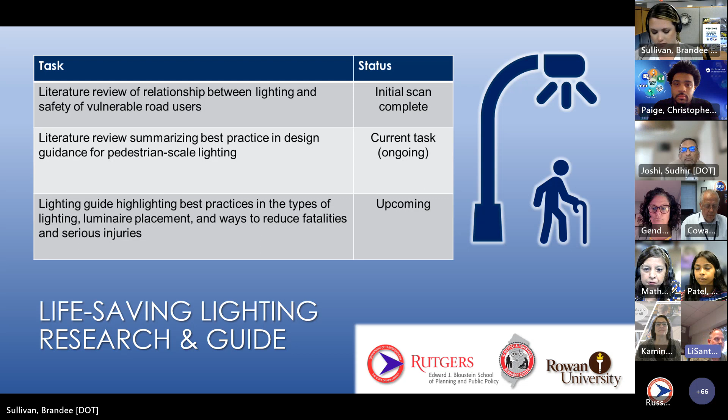Activity 2, NJDOT, through a task order contract, is developing traffic signal pole and mast arm details based on the 2015 AASHTO requirements for signalized intersection installations, including back plates with retroreflective tape on traffic signal indications. Once those new details are completed, NJDOT will require all new installations to include back plates and retroreflective tape on all signal indications. The preliminary submission for the task order to develop the new signal standards will be made in August. At this time, the Bureau of Traffic Engineering has been installing back plates on signal pole heads installed on steel mast arms whenever possible.

I think that ends our update for the safety group. Okay, thank you, Dan and Amy. Next up, we have Shivani Patel and Nunzio Merla from our Infrastructure Preservation Team.

Good afternoon. My name is Shivani Patel, and I'll be providing the update for the Infrastructure Preservation Initiatives. So there are 2 initiatives.

First is EPIC. Internally curing concrete has many benefits. To provide a little background, this practice involves providing water to the cementitious matrix after setting. With conventional curing, water is supplied on the concrete surface. Internal curing provides a source of moisture from inside the concrete's mixture with pre-wetted lightweight aggregates which distribute the curing water throughout the concrete body.

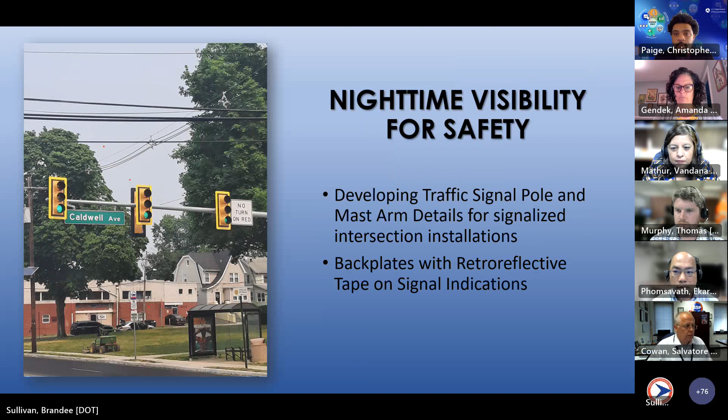Thank you, Sal. Okay, let me just skip forward. Okay. Thank you, Aik, as you were. Continue. Thank you, Brandee.

We also wanted to provide some clarification: we originally assessed ourselves as being institutionalized in practice. Upon further discussion among the team, we thought it would be better to take a step back and put us in the assessment stage, part of that continuous improvement, continue to assess the technology, identify some best practices and lessons learned, and also incorporate some strategic activities into the NJDOT ITS and traffic ops work program.

A QR code survey was also developed based on the EDC implementation plan form. The next subsequent step is to review feedback from the local agencies and emergency responders to better understand their needs and challenges, if any, and better help inform NJDOT with the development of implementation plan activities.

We also have an abundance of trucks in the left lanes of roadways that can cause traffic to move slowly. There is a plan in place for NJDOT to deploy no-trucks-in-left-lane alerts for truck drivers. Information will be sent to the in-cab or mobile device utilizing the Drivewyze system for roadways that have more than 2 lanes, as a way to remind truck drivers of the state vehicle code of no trucks in the left lane for corridors that have those signs in place.

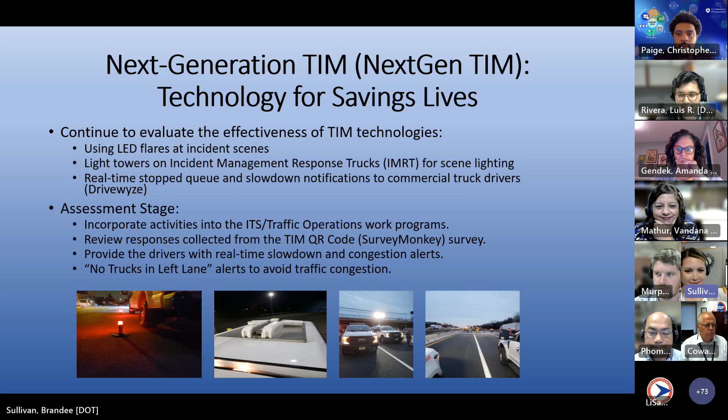Okay, thank you, Aik. Now, last we have Sudhir on behalf of Andy Swords and Sutapa with updates from our newest CIA team, Planning and Environment. So I'll pass it over to you, Sudhir.

Okay. Brandee, can I share my screen? That would be easier because I have my notes to speak from. Okay. Sure. Yeah. All right. Let me share my screen first. All right. Can you see my screen? Yes.

Oh, it should come up.

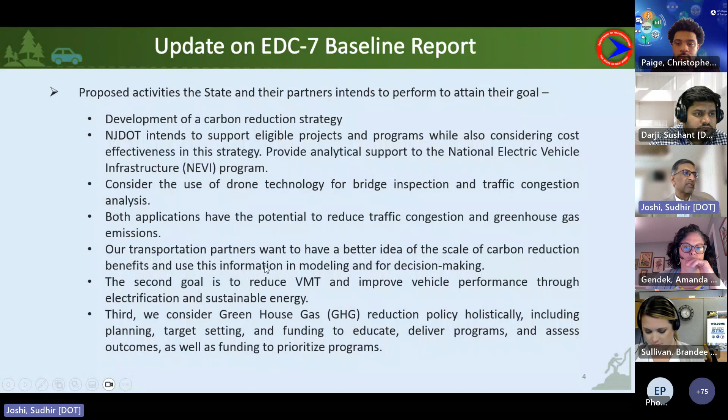So the other question is, can the innovation deployment team provide assistance to help the state and their partners reach their goal within 2 years? So how we can achieve? By training, technical support on specific projects and issues, workshops or peer exchanges, and case studies.

The next is innovation implementation team members. Who are the team members? For NJDOT, Andy Swords is the lead, and Sushant Darji from our unit. And Brandy's name is not here, but I believe Brandy is also one of the lead team members here. And from Federal Highway side, Sutapa and I believe Chris Paige. So this presentation, Sushant, we need to revise before we send it out.

The state innovation goal, the benefit goal. So currently transportation accounts for about 42% of the greenhouse gas emissions in the state and 29% of the greenhouse gas emissions nationally. The obstacles are difficulty generalizing the effects of the projects to the entire transportation sector and the need to develop a process for understanding greenhouse gas impacts of the construction. And the implementation plan activities, the deployment of carbon reduction strategies and NEVI program support.

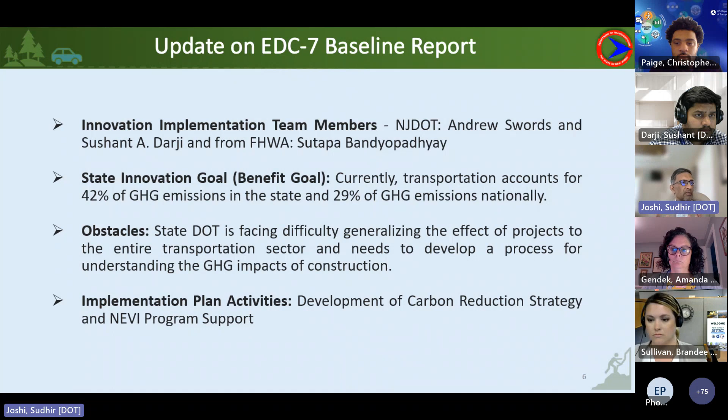So next, the background. As you know, the Bipartisan Infrastructure Law established the CRP and provided funds for the projects designed to reduce transportation emissions, as carbon dioxide, CO2 emissions from on-road highway sources. And other emissions can also be converted into equivalent of carbon dioxide, CO2e, they call it. And funds apportioned to each state, eligible project types, coordination and consultation, and completion of the CRP strategies are by November 15, 2023. So that's our deadline we are focusing on.

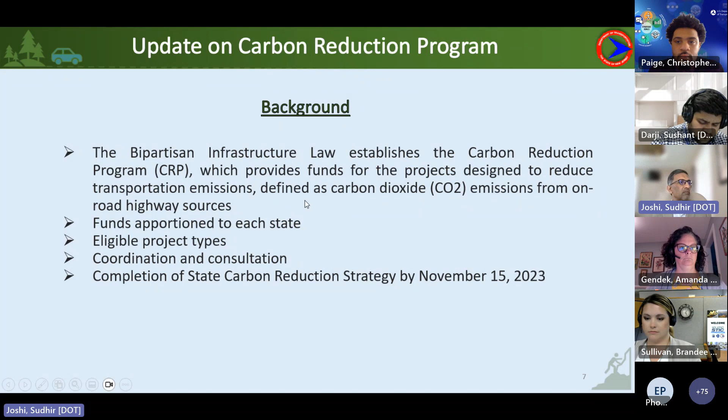The purpose is to identify projects and strategies that will contribute to helping New Jersey reduce its transportation-related emissions and serve as a basis for the state's decision-making on the use of CRP funds. The consultation with the other agencies. So we conducted a survey involving multiple agencies to determine the types of projects being pursued by the state, established a strategy that considers present plans without excluding the future plans, and developed a strategy that may serve as a resource for the other agencies.

So what are the project types? Replace medium-duty trucks, replace diesel off-road equipment, new active transportation facility, expand transit bus services, signal synchronization along corridors. Our task partners would be very helpful in those strategies. Construction methods, replace lighting with LEDs, install public EV charging stations. We are working towards the NEVI plan. Replace diesel buses. We have a diesel retrofit program that we are working to progress further, and new van pool services, expanded light rail services, projects to relieve highway congestion, innovative technologies, and replace heavy-duty trucks.

So, a project example for sustainable construction materials like foam glass aggregate. This has been discussed in many presentations and many times before. But what it does, it provides 50% less CO2 than other lightweight aggregates. One truck of foam glass aggregate equals 7 trucks of regular backfill off the road. So it's a big reduction in carbon emissions.

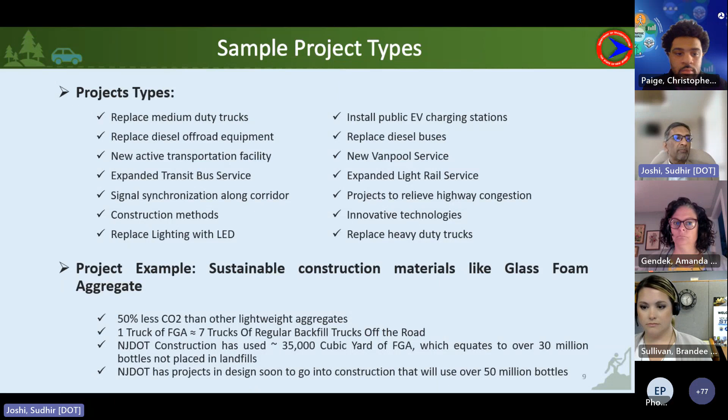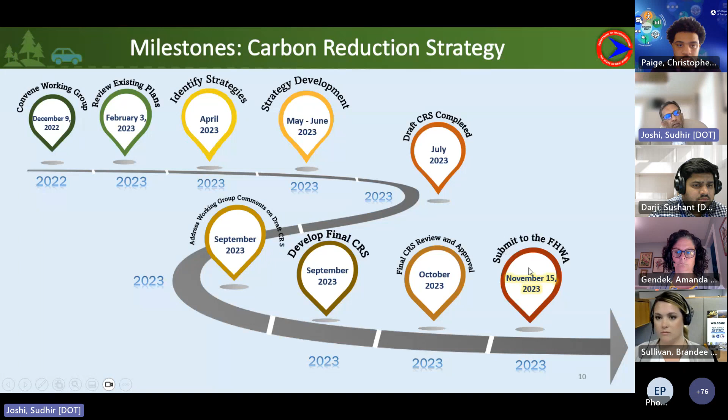And in September, we address the working group comments on the draft carbon reduction strategies and develop the final strategies. Then we get the approval in October and submit on November 15. Currently, we are establishing these strategies by soliciting feedback from all the other agencies and analyzing the approaches developed by other states for their states. So we're taking benefit from knowledge from other states.

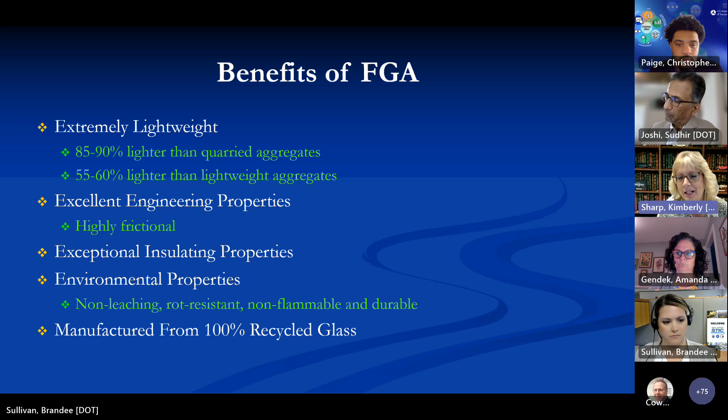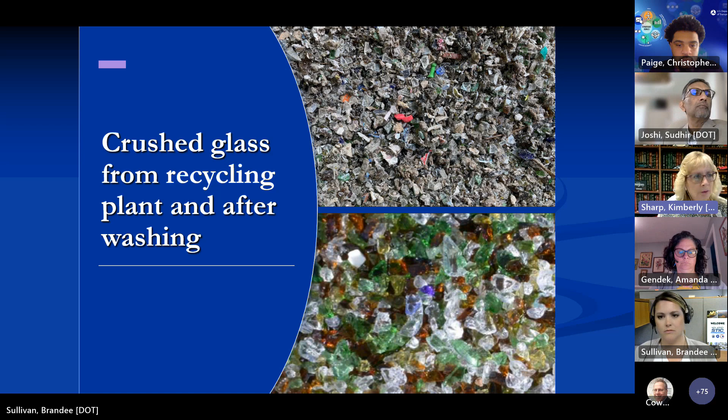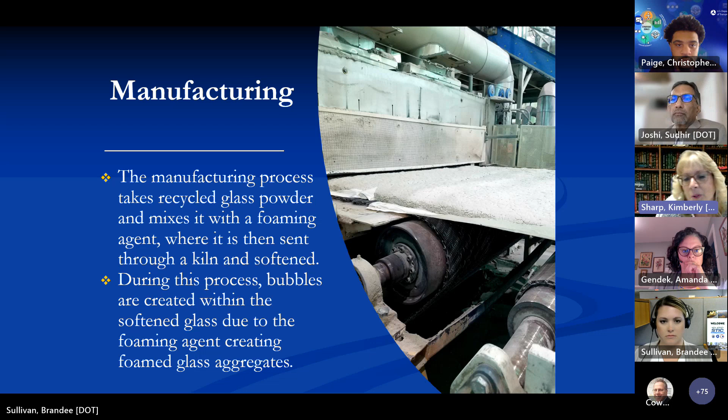On the next slide, you'll see at the end of the conveyor belt, once it's cooled, it'll drop down onto another conveyor belt and it goes outside into a big pile. I know you guys can't see me too well, but these are pieces of the foam glass. It's very, very light, and they're just variable sizes. It looks like an aggregate. And so this is the process of how it's made, and there's hardly any people or machinery that goes into the process of making this. It's a very, very simple technique.

So how do we use it in transportation? In areas where we've used it and we're going to use it, like in Atlantic City or up in Kearny, some of our roads are level with ground zero, where the water level is. We have tidal effects or heavy rains, and our state highways will start to flood over. So we say, okay, we want to raise them up 2 or 3 feet so our roads aren't getting shut down when we have a full moon or high tide or heavy rainstorms.

But we may have some soft compressible soils right underneath the pavement. So what we can do is excavate out some of this heavy regular material and replace it with this lightweight foam glass aggregate. It is wrapped when it's installed; I do have some pictures I'll show you. And then we have to cap it with heavier material because it is lightweight and will become buoyant in water, so we want to make sure that we have enough weight on top of it. Our pavement people require, I think, 8 or 9 inches of soil above that before they put their pavement box on top.

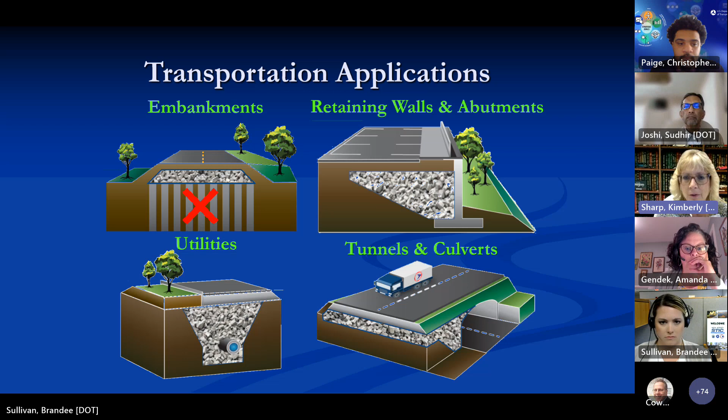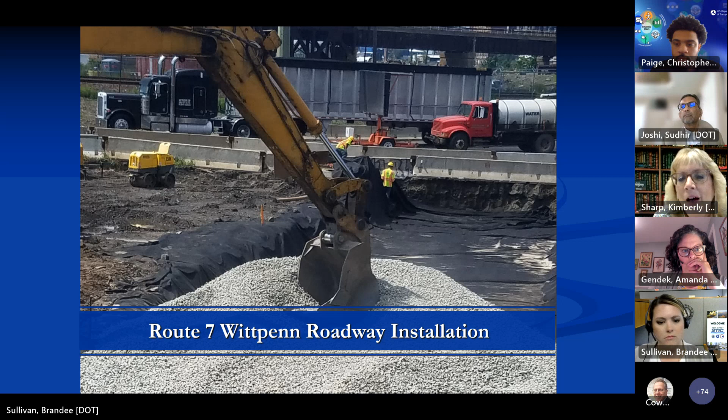Then the foam glass aggregate is dumped into, yes, you jumped a little quick, but anyway, so the truck in the background, because I don't have my pointer, but the truck in the background is how the lightweight, nope. You can go to that one, okay.

So the truck in the background, that's what the lightweight aggregate comes in. It's got a lift on it, it'll dump it out, and then the backhoe will spread it out. You can see the black liner and the material spread out, and we don't compact it like regular soil. There is a small compaction that you have to do. If you have a track mounted machine such as that, you have to put it down in 2-foot layers, and you have to do like 4 passes on it. If you don't have a track mounted machine like that, you have to do it in 1-foot lifts, and you have to do hand tamps of like

4 passes. But anyway, so the material comes, it's wrapped up, completely surrounded, so they don't have infiltration of the soils around it getting inside of it. You can go to the next slide.

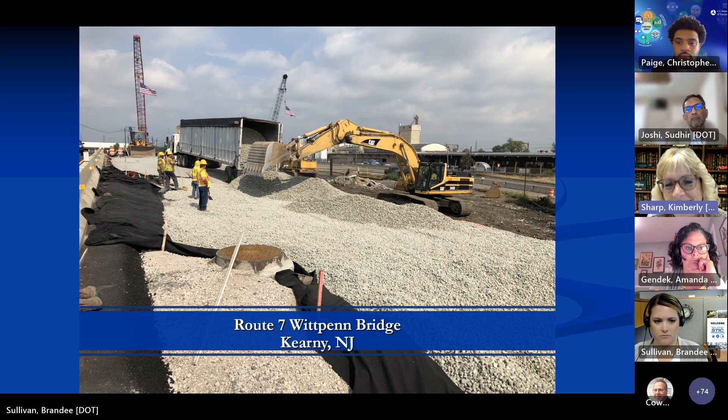We removed the existing soil and the approach slab, and we laid down, like I said, the geofabric material and the foam glass aggregate to lighten the load on the approach.

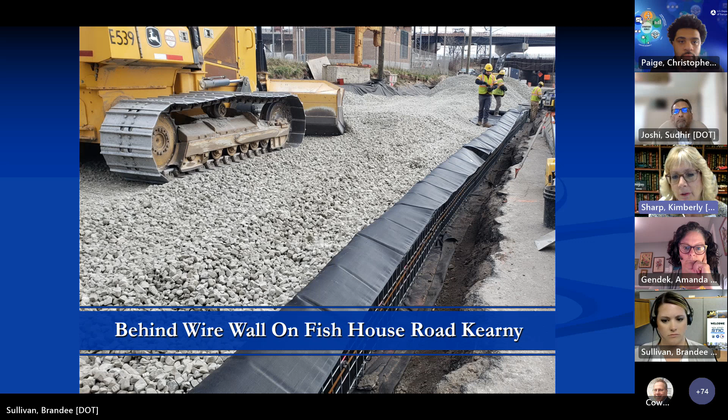But this was absolutely great because the soil that we have out in and around Fish House Road is highly, highly compressible. So this was a very good product for us. And go to the next slide.

So this is just explaining how many millions of bottles New Jersey DOT has already saved from going into the landfill. So on the Route 7 Wittpenn project, we saved 27.6 million bottles from going in the landfill. The Route 80 over Rockaway, which I showed you where we used it on the back walls and the approaches to the existing bridge, we saved, that was cute, the little applause, Sal, 1.9 million bottles.

Route 1 and 9, New Road Contract 1, we didn't use too much there, but we did find an application where we had an issue and we had to look out for lateral forces. So we said, hey, let's use the foam glass aggregate. So that was still, I mean, it's substantial. It was 0.8 million bottles.

Route 322 Mullica Hill, in-house, we built a new wall to support an existing dilapidated wall, which was raised up above the homes in the river. And as a backfill between the two walls, we put in the foam glass aggregate, and that saved us about 21,000 bottles.

But, you know, we were all into using this, so we're like, hey, we're going to use it, even if it's a smaller amount. And then the next slide, I think, is talking about some future ones.

And like I said, down in Atlantic City, I know we have talked about it, where they want to raise Route 40 and 322 to get it up above the current high tide levels, so we're not flooding as much. And if they do, we calculated how much the cubic yards of normal soil they would need, and that equates to about 30 million bottles that we will save. Route 47 widening, same thing over compressible soil, so it helps to lighten that load for that widening of the road, 7 million.

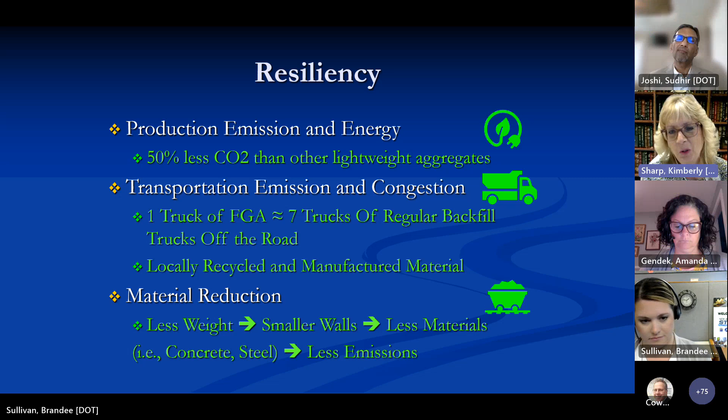And then we've been thinking in our office about different areas, like flood mitigation for underground reservoirs, maybe using the material. I know we don't build too many noise walls anymore, but years ago when we were building noise walls like crazy, we were looking at all different types of materials to put in there. We used shredded tires and different things, but if we do start building more noise walls, maybe we can put the foam glass aggregate inside the panels. And again, we're always looking at ideas with our rehabs for our abutments and our retaining walls, if we can find applications of using the foam glass.

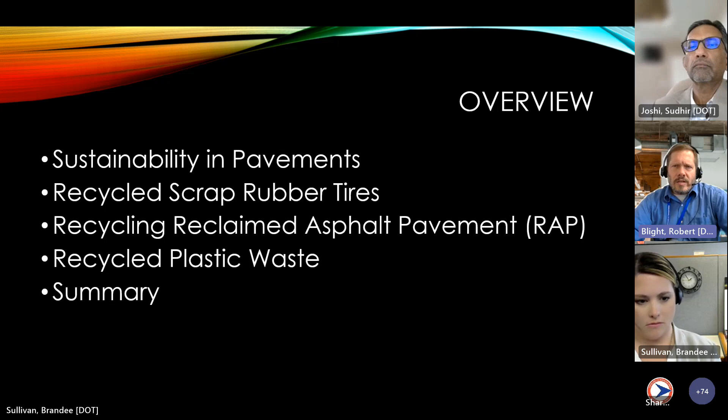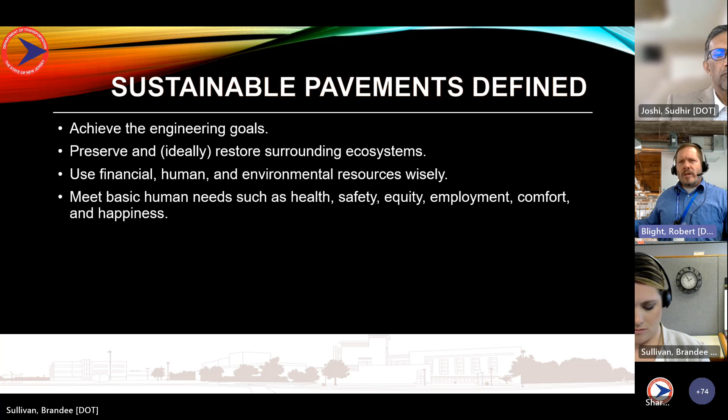Just sustainability defined, we want to achieve the engineering goals. We want to preserve and restore surrounding ecosystems. We want to use all our financial, human, and environmental resources wisely. And at the same time, meet basic human needs: health, safety, equity, employment, comfort, and happiness. Next slide, please.

So this is the life cycle stages for pavements. Most pavement materials are 100% recyclable. And we are recycling large amounts of our pavements back into new pavements and other applications. But quickly the stages: materials, design, construction, use, maintenance and preservation, and the end of life. Next slide, please.

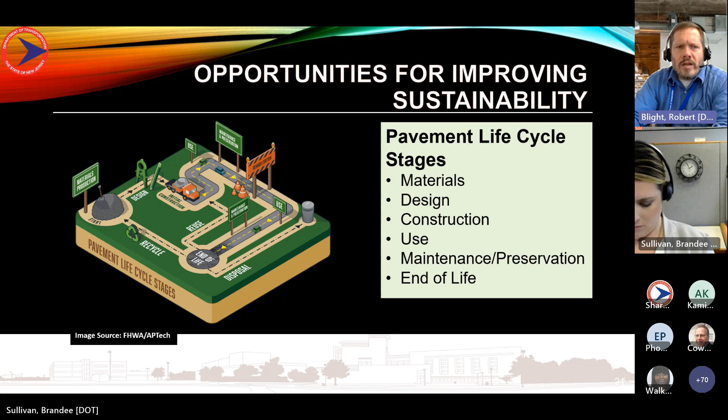So the benefits: we want to reduce pavement life cycle costs, greenhouse emissions, reduce energy consumption and noise, improve safety, ride quality, and conserve our natural resources as best we can. Next slide, Brandee.

So first one, recycled scrap tires. We've had some experience with this over the years, but as you know, it's a big waste product. It is an engineered product, so it has value. These tires, if they're made in the US, which is a requirement of use for our applications, it has to be manufactured in the US, but it has very good qualities, polymers that help increase viscosity of our asphalt binders. They can increase the film thickness on the aggregates, which in turn leads to better durability, crack resistance, and in fact, rut resistance in pavements.

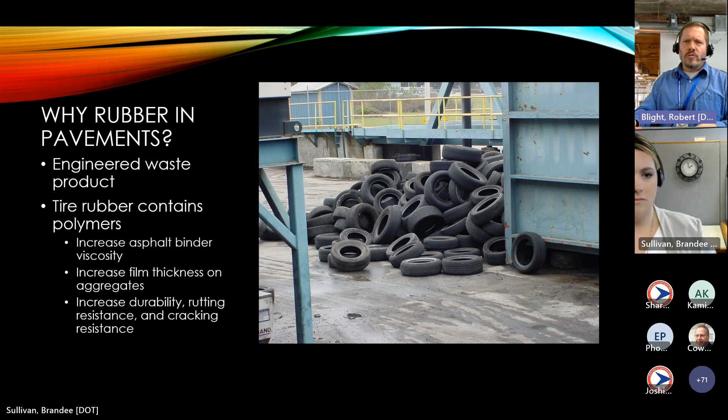The polymers modify the asphalt when used in a particular process called the wet process, and improve it on the high temperature end of the spectrum and the low temperature end of the spectrum. Next slide, please.

So what we're trying to achieve, we want to reduce the amount of tires that are going to landfill and reduce landfill, prevent pollution. Apparently, when these tires go into a landfill and water hits them, they bubble. That water then damages the liner in the landfill, and that leachate from the landfill can seep into the groundwater.

So other pollution that we're trying to prevent, tire fires. If anyone has ever seen a tire fire, they're nasty and they're difficult to put out. We had a structure on Route 80 years ago that was damaged due to a tire fire that we had to replace in an emergency situation. And methane gas. Methane gas is part of that air pollution issue.

Some of the other things we're trying to prevent is disease from pests, mosquitoes, rodents. These types of landfill debris attract this type of pests that can spread disease. Next slide, please.

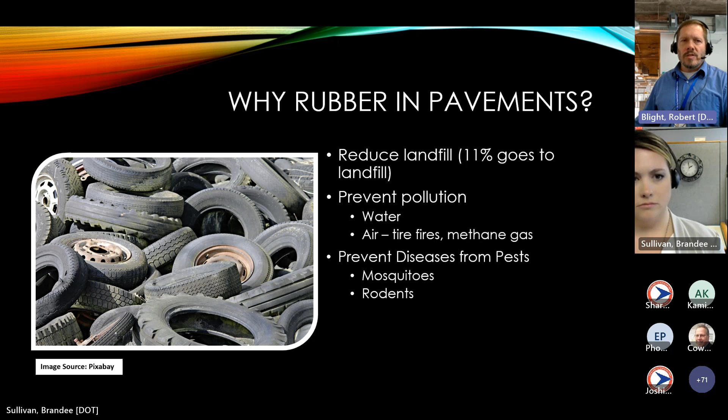So as I said, the process that is the most utilized across the country, that we've seen the most value from, is the wet process, which is a ground tire rubber material that's ground at a tire recycling plant and then is incorporated back into the asphalt according to this ASTM specification D6114. This asphalt rubber binder is then used in a few different products, which I'll go over 3 of them, but it's also used in other applications as well for pavements.

One of the ones that we use it for is asphalt rubber open graded friction course, asphalt rubber gap graded courses, asphalt rubber chip seal. What we found is that we can recycle up to 1,000 tires per lane mile when used in some of these applications. Next slide, please.

So this is what the product looks like. This is actually my hand at one of the plants where we were using this product on a project. But it's a 30 mesh, which if anyone's familiar with aggregate sieves, the material is about a 30 mesh sieve size. So it's like a beach sand. It's ground into that product. The steel is separated from it and the fibers at the recycling plant.

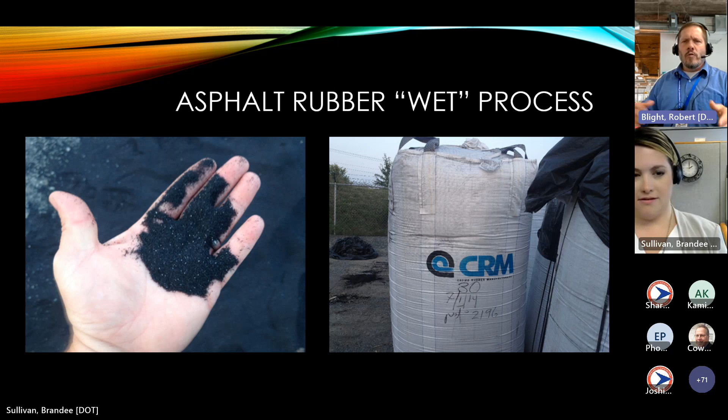That blending occurs, and then it's allowed to react in a reaction tank for a specified amount of time, and then it's tested to ensure that you have the right quality. It's tested for viscosity, actually rotational viscosity. Based on the temperature and rotational viscosity, the person at the plant can determine if the quality is sufficient for

that asphalt rubber binder. Once it's determined sufficient, it is added into the HMA production or the asphalt production at the plant, mixed with the aggregate, and then tested again for other properties for the mix, and then once approved, shipped out to the projects. Next slide, please.

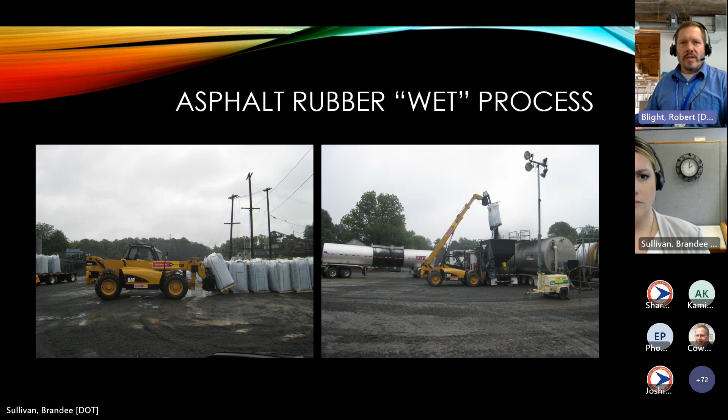So this is just one of many projects that we've done over the years. This was a project right here north of our location in Trenton on I-295, I believe it's between Scotch Road and Route 1, where we had a section of asphalt rubber open graded friction course constructed in around 2007. It performed for a number of years before we covered it with a preservation treatment.

But what we found in a lot of these projects is maintenance had issues with winter maintenance on open graded pavements in general. So we paused use of this type of material all over a lot of our highways. However, it still has applications in other areas, such as maybe shoulders or park and rides, things of that nature. So it may be something that we still have in our standard specifications and we may use in the future.

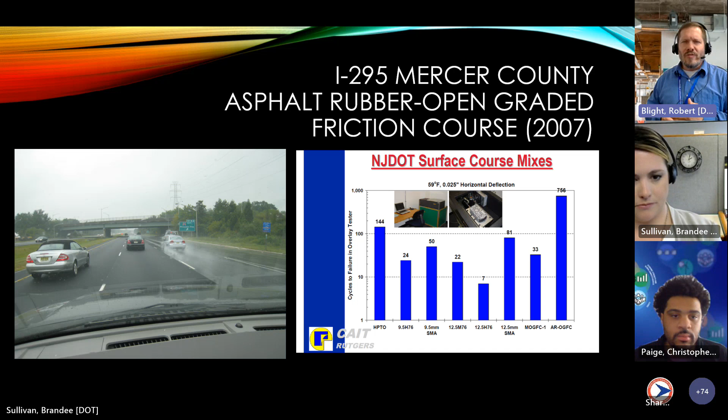Next slide, please. The same asphalt rubber binder goes into a few different products, as I mentioned. Another specification we developed is an asphalt rubber gap graded mixture, which isn't like the open graded where it has more of an open texture. The voids are around 14 to 20%. This particular product, the voids are more like a standard asphalt material, so we don't have the winter maintenance issues with it. So we've done one pilot project back in 2014, and we may get back to using more of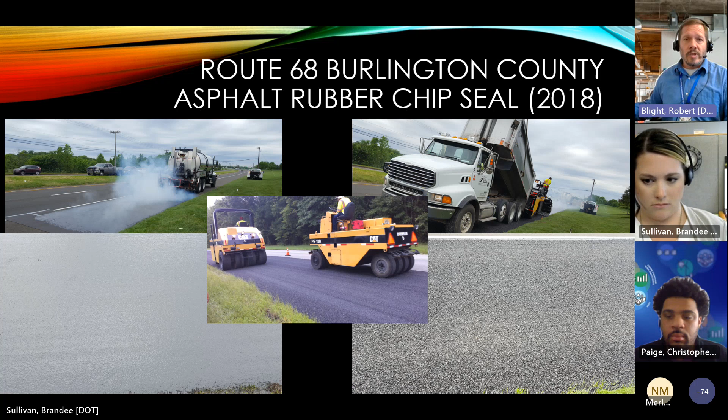A little bit about recycling or reclaimed RAP. Next slide. So what is reclaimed asphalt pavement? Again, it's what we get after we mill up a section of roadway for resurfacing, or we remove the asphalt entirely and ship it back to the plant. We have a pile or piles of RAP. This particular material is engineered. It was engineered for our roadways. It's just being ground up and sent back to the asphalt plant. So it's an engineered waste product.

It has value. Our goals are to reduce virgin material use, again, reduce energy consumption and emissions. If it's done correctly, it is economically sustainable. It's environmentally sustainable. However, there has to be a focus on long-term performance. We can't compromise performance just to say we recycled the material back into our roads. So I stress that because there is a push to use more RAP, but it's got to be done the proper way. Next slide, please.

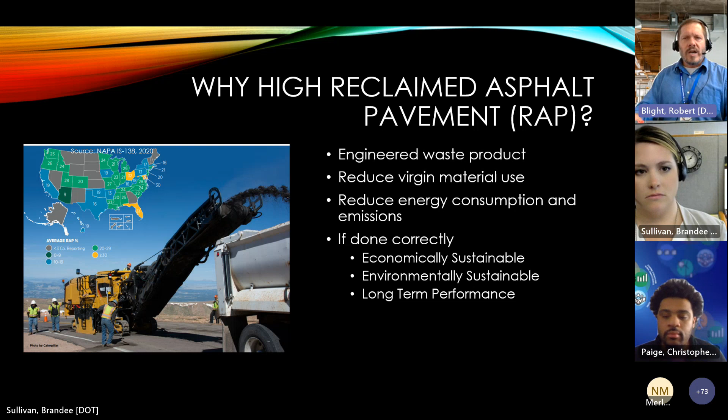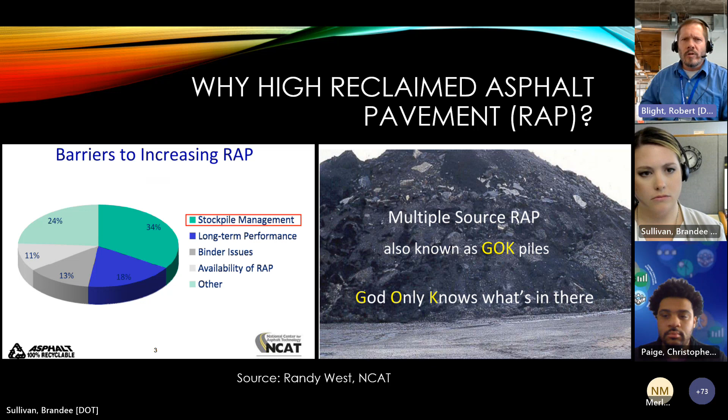There's some binder issues with certain quality RAP and the type of binder that you have to use to be compatible with it. In other parts of the country, there's a lack of availability of RAP. We don't have that issue in New Jersey. We have some mountains of it, and we're going to try and use more of it going forward. Next slide, please.

So this was a project that we did. Back in around 2011, 2012, we developed a hot mix asphalt high RAP specification. This specification allowed the industry to put in a minimum of 20% RAP in the surface course, which gives them free rein to put in 100% if they can design the material to meet our performance goals. Same thing with the intermediate and base, minimum of 30, 100% max, as long as they can meet our performance requirements. We had a successful pilot project on 295 down in South Jersey years ago, back in 2012.

It was a high RAP mixture, as you can see. It was very successful. It's still in place today. We're planning a preservation project potentially over top of it in the near future, but it can be done if it's done the right way with quality and long-term performance at the forefront of those decisions. Next slide, please.

Recycled plastic waste. We've been dabbling in this because there's been, as you know, a global push to do something with the plastic waste. So next slide, Brandee. As you may know, China stopped accepting plastic waste back in 2018, which caused a global panic because they were taking almost 50% of all global plastic waste, which equates to about 100 million metric tons annually. Now we have to find some place to put that plastic.

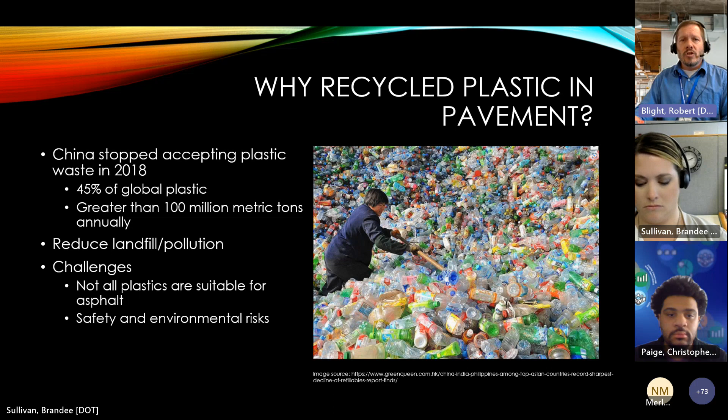We want to reduce landfill of that product because some of it is quality, not all of it. There's a very complex waste stream, as you'll see, but there's challenges. Some of it's not suitable for going back into our pavements, and there's safety and environmental risks. If we're blending it back into asphalt, it may cause very toxic fumes and things like that for our workers. So there's got to be great care in doing this the right way. Next slide, please.

So there's ongoing global research right now. In the US, we have the Asphalt Institute, National Asphalt Pavement Association, and NCAT, National Center for Asphalt Technology, looking at this and studying it. And there's a ton of other researchers across the country researching how to incorporate waste plastic back into pavements. But again, as I said, it's a very complex waste stream. There's all different qualities and types of plastics, contamination issues. So there's a lot of knowledge gaps. There's a lot of performance issues.

We are doing a study with Rutgers University, evaluating use of recycled plastics in our asphalt mixtures as a modifier. There's a number of products, as you can see on the left, what some of those look like with varying types of plastic in there. We found some suitable and some not suitable. Some actually are detrimental to the performance of the pavement. So again, great care needs to be taken to do this the right way. Next slide, please.

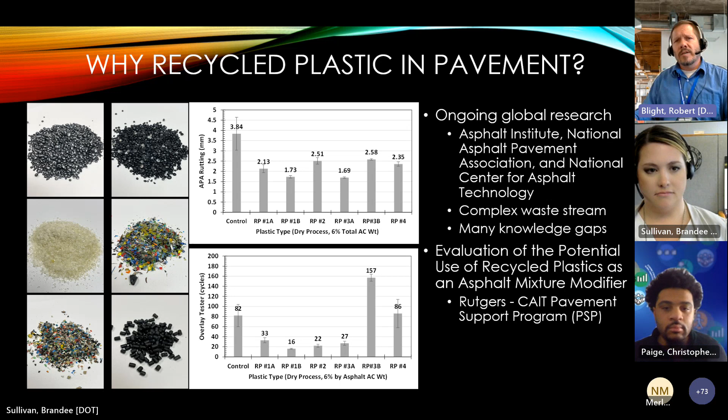So I took this from an article that was posted on Asphalt Institute's site. Dr. Mark Buncher, I've had many conversations with him over the years. He's a great guy, great resource for information, but he said plastic's not the first product that has been researched to add back into asphalt. RAP, asphalt shingles, crumb rubber, many of them, we're doing that. We're recycling them. But again, engineering and science has to lead the way in order to do this the right way. And it should certainly include long-term performance.

Next slide, please. So as a summary, we can use these recycled products in pavements, but we have to take our time and do it the right way, research it, engineer it, and let those types of research and findings drive decisions on how we're going to move forward using these recycled products. That way we don't suffer the results of unintended consequences. Research, standards, and governance, absolutely necessary.

Quality is a huge issue with a lot of recycled products in the industry. There's varying levels of quality at different plants, so we have to really pay attention to quality, make sure we're getting it. Health, safety, and environmental stewardship, long-term performance, and sustainability. Again, we can't let politics dictate how we do this. We have to let research and engineering dictate how we do it. That way we get roads that perform for our taxpayers. I think that's it for me.

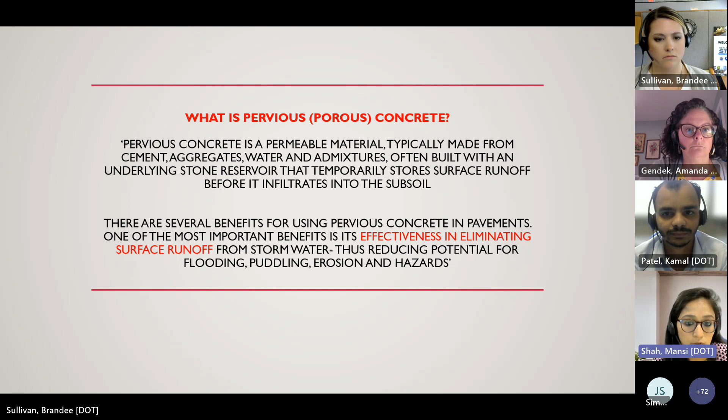Next slide, please. Phase 1 of this project involved evaluation of various mixes for mechanical properties, workability, and durability. Several sidewalks in Camden County were evaluated using visual inspection and infiltration tests. A survey of stakeholders on implementation of porous concrete was conducted, and several mixes were developed that would give higher strength while maintaining the required void ratio for acceptable infiltration. This was the recommended mix that they came up with. Next slide, please.

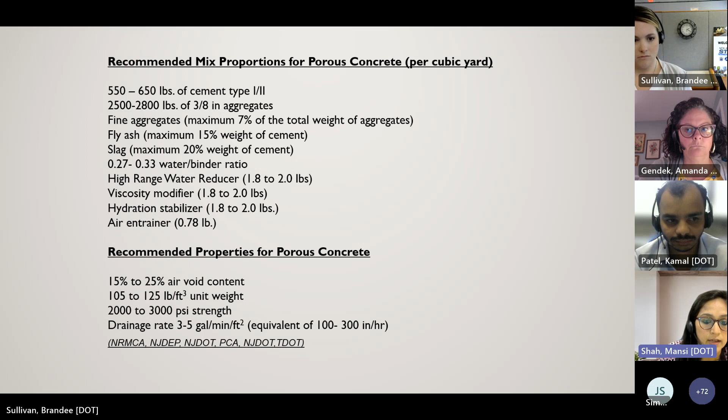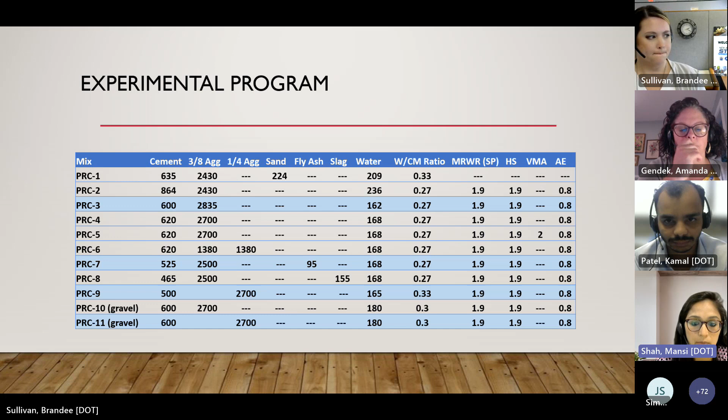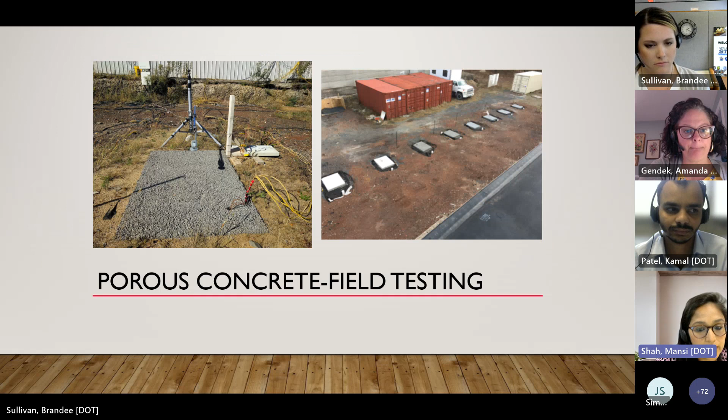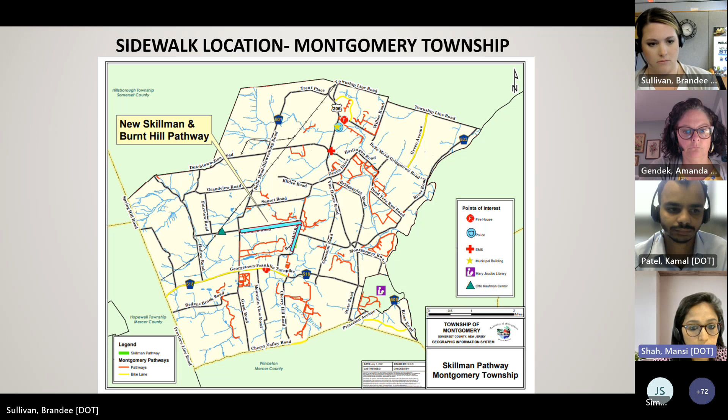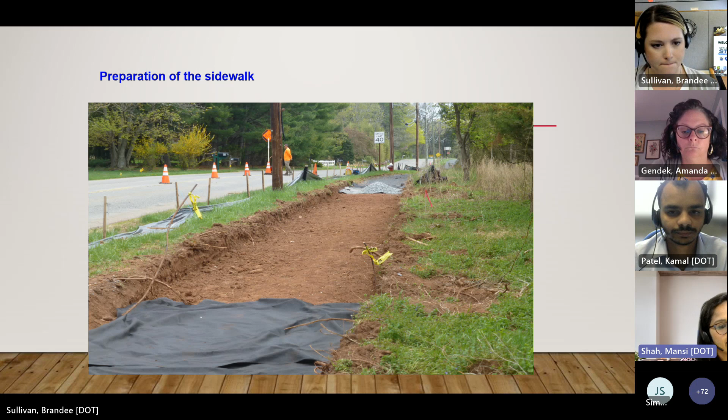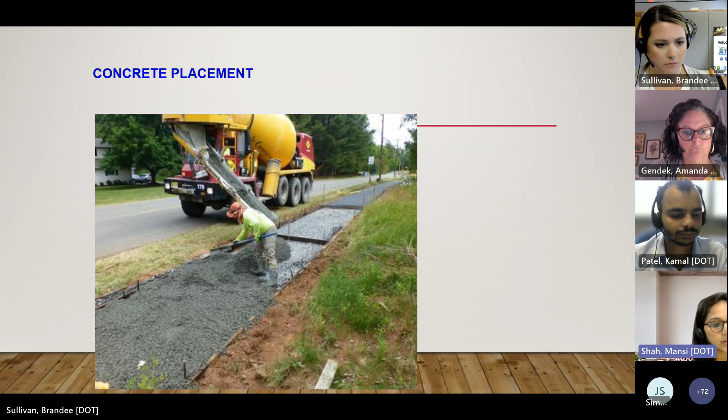Next slide. Here we can see some images of how the preparation for the sidewalk was done. Here is the fabric that is being laid. Next slide. And these are just some images. We can keep going through them, Brandee. And then this was the placement of the expansion joint filler. Concrete was being placed. And then the finishing. And here is a view of a finished section of the sidewalk.

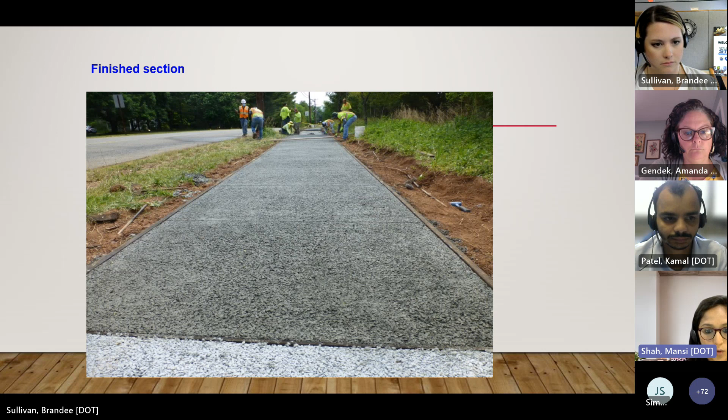Next. And there was also a collection of field samples that was done. And then the sidewalk was monitored and evaluated over time to assess its performance. The monitoring of the built sidewalk included visual inspection for surface texture, clogging, and raveling, periodic infiltration tests to measure variation of infiltration rates over time, and coring of cylindrical cores to measure in situ void ratio and compressive strength in the lab. Next slide, please.

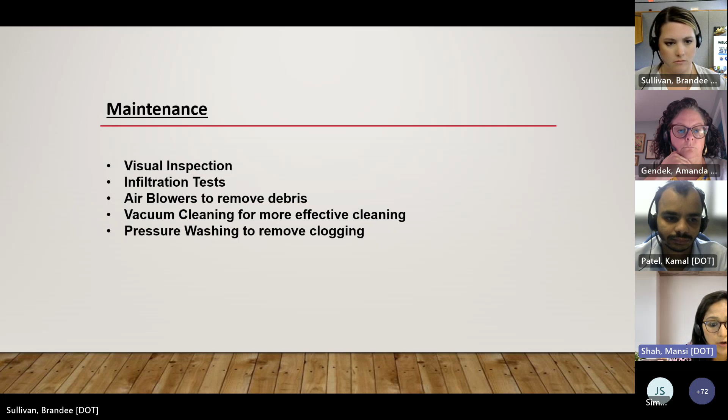Visual inspection showed that air blowers can keep the sidewalk free of debris if done frequently, but vacuuming with suction twice per year was more effective and can keep the porous concrete sidewalk free of debris and minimize clogging. Next slide, please.

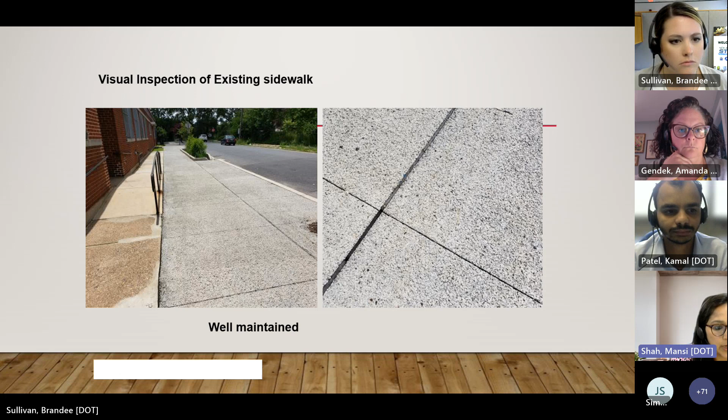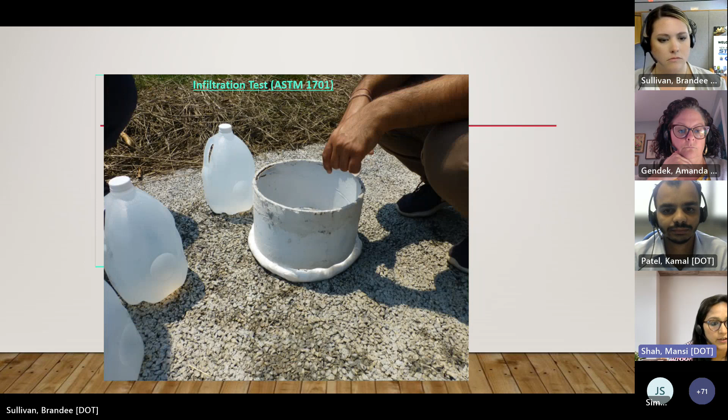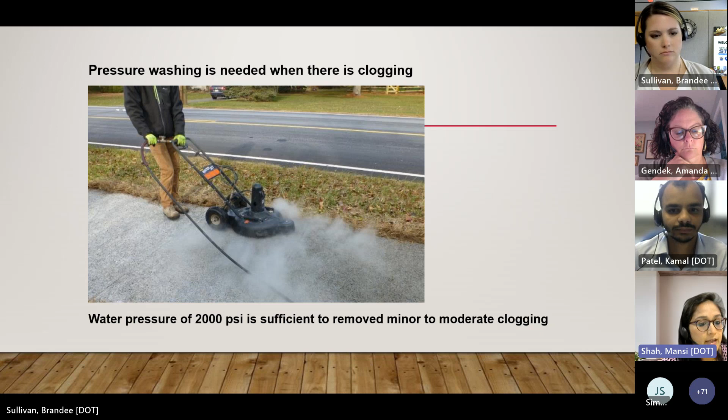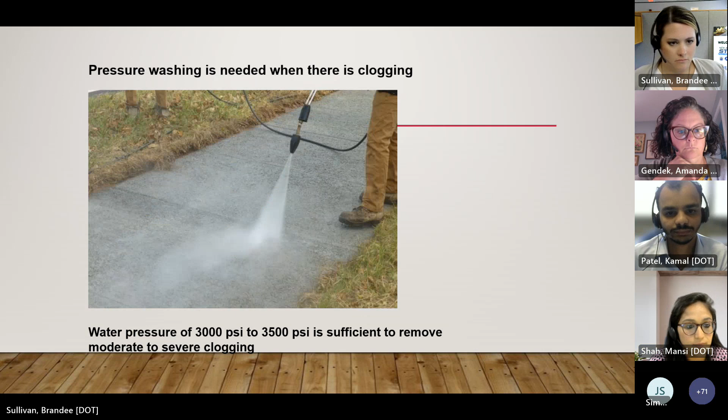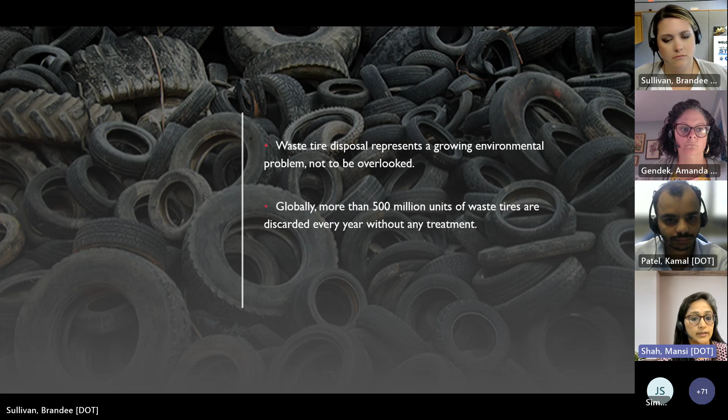Next. The next sustainable material that is being researched is rubber concrete. And thank you, Robert, for your presentation before this. We weren't aware of all the stuff that you've already been doing, but this is an area, next slide, please, where the Bureau of Research wants to conduct further research studies as well, as we know that waste tire disposal represents a growing environmental problem, and more than 500 million units of waste tires are discarded every year without any treatment.

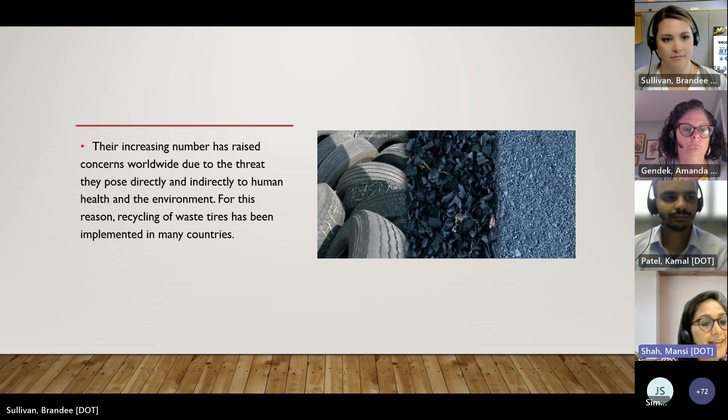Next. This has raised concerns worldwide, and it poses a threat to the environment as well as human health. The possibility of recycling scrap tires as aggregates in concrete and asphalt has gained acceptance worldwide, and the Bureau of Research is currently looking into this material for possible use on roadway applications. Thank you, Robert, for your detailed presentation of how asphalt rubber binder has been used. Next. We would be happy to collaborate on research projects in the future if you have any specific research needs in this area. And that's it from me.

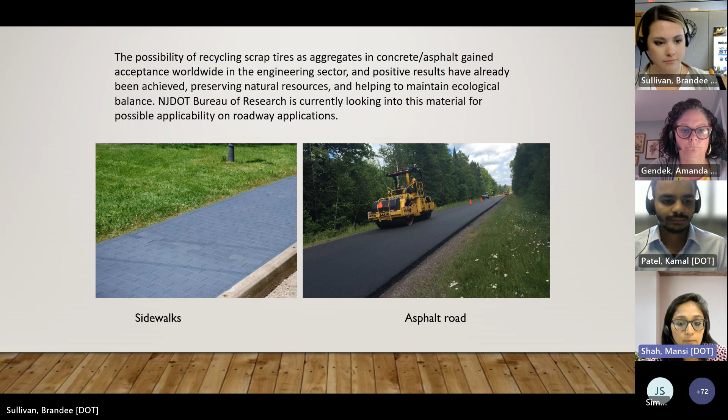I would like to invite my colleague Kamal Patel to talk about energy harvesting now. Hello, good afternoon, everyone. My name is Kamal Patel, and I'm going to be presenting on energy harvesting from roadways and bridges. The PI for this project was Hao Wang, and the project manager for this project was Giri Venkiteela. And next slide, please.

So there is growing congestion in transportation, and along with that, there is also deterioration of infrastructure. These are some of the challenges that the DOTs face, along with monitoring of that deteriorating infrastructure. There's also a challenge in the significant amount of electricity being produced from fossil fuels, which are increasing greenhouse gas emissions. All of these challenges can be addressed by using our current transportation infrastructure to generate electricity.

Next slide, please. For the research motivation of this project, the research was conducted in two phases. The first phase looked into photovoltaic materials, and the second phase looked into piezoelectric materials. In the first phase, the photovoltaic materials, or solar panels, were mounted on noise barriers. This would help generate electricity, reduce greenhouse gas emissions, and also reduce noise at the same time. So next slide, please.

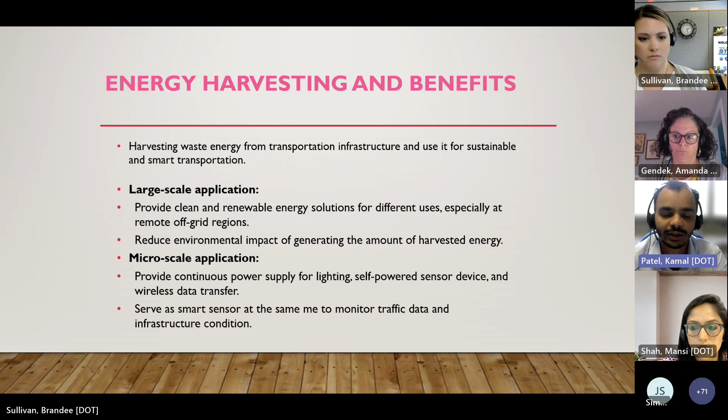put in this technology. And also the electricity that is generated could be used to power sensors and other lighting and also wireless data transfer devices along with the noise barriers to monitor our traffic data and also to monitor our current infrastructure. Next slide, please.

So photovoltaic materials are basically devices that, when they absorb light, produce electricity, and they have many different applications in the transportation industry. We could be using them on tunnels, on our sidewalks, and also on noise barriers, and there are many more different alternatives for solar panels in transportation. Next slide, please.

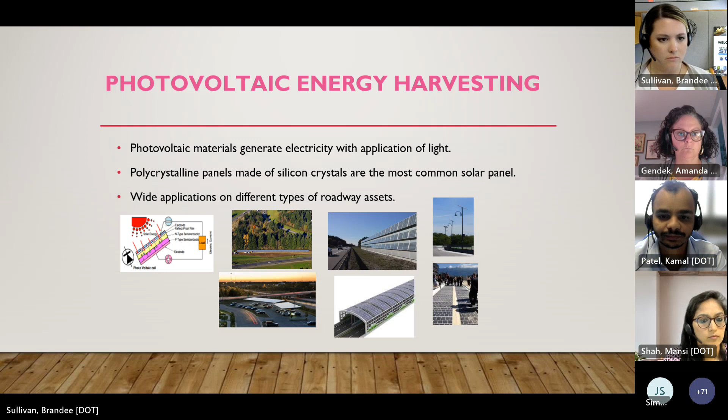So for this project, we had a design configuration of retrofitting solar panels on noise barriers in three different configurations. First was top mounted, then there was multifacial, bifacial, and also there was shingles. And next slide, please.

And what we found after analysis is that the maximum power output we got was when we used 3 shingles to 4 shingles, because in that configuration, the solar panel does not need to be oriented so that we constantly get the maximum power output.

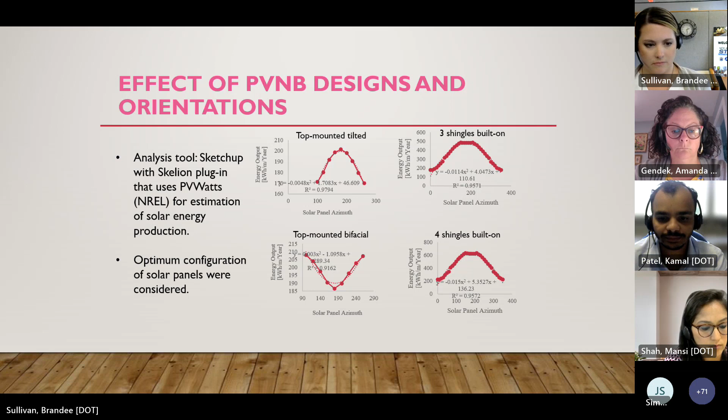So there are 106 miles of noise barriers in New Jersey with an average height of 17 feet. After the research team did some calculations, they figured out that we could be getting a higher amount of energy output just in New Jersey by using those 106 miles of noise barriers if we put solar panels along them.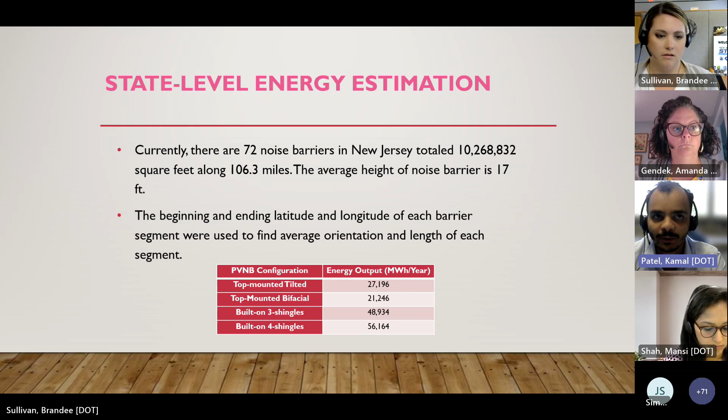The research team also gave us methodologies to select certain noise barriers for site selection, so some of the things that they considered were economic factors, environmental factors, and also social factors. Next slide, please.

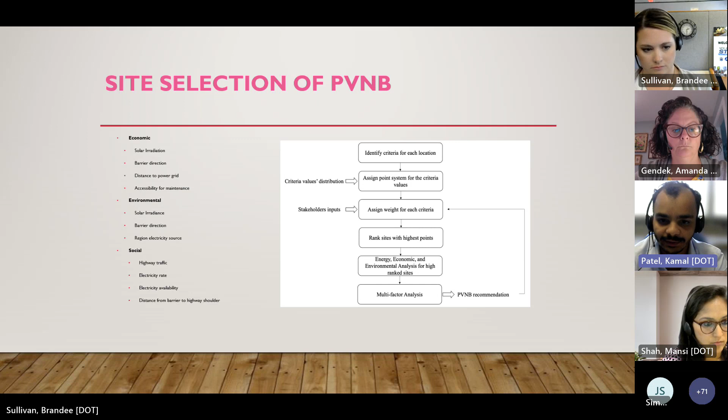In conclusion, what the research team found was that when using photovoltaic materials, we need to use a shingle-based configuration when we are retrofitting the solar panels to get the maximum power output. Next slide, please.

There are also piezoelectric materials, which are really new. These materials, when stress is applied on them, create energy. Some common types are lead zirconate titanate and polyvinylidene fluoride. Next slide, please.

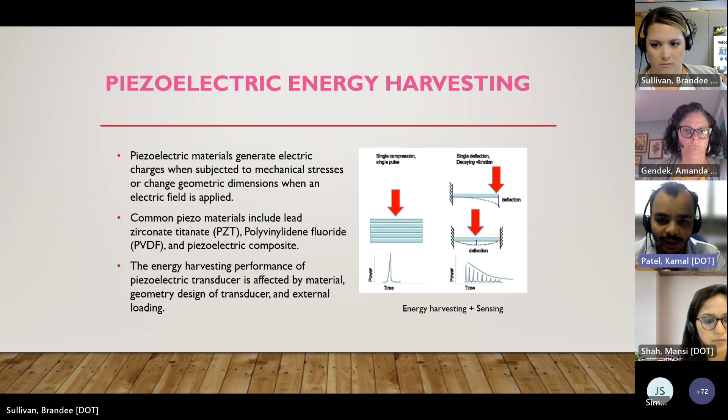So these materials can be embedded into infrastructure. An example of this would be pavements, and as a moving load of compressive force goes along it, it would generate electricity. There is also vibration-based, where it could be attached to bridge infrastructure, and as the bridge vibrates with different types of load moving along it, it will generate electricity.

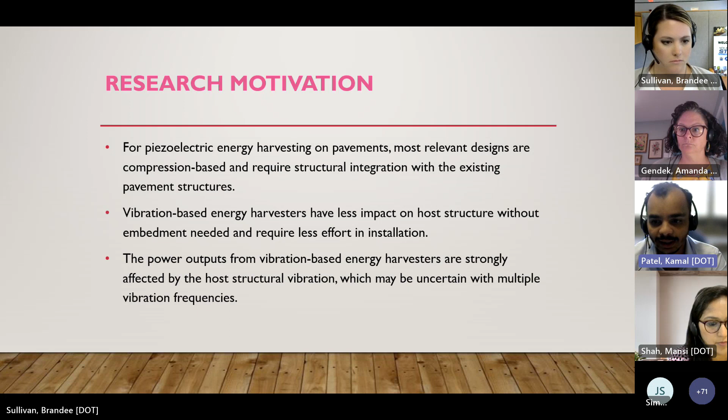Next slide, please. The research objective and scope of this project was to basically take this material from laboratory testing to numerical simulation and to a full-scale test. Next slide, please.

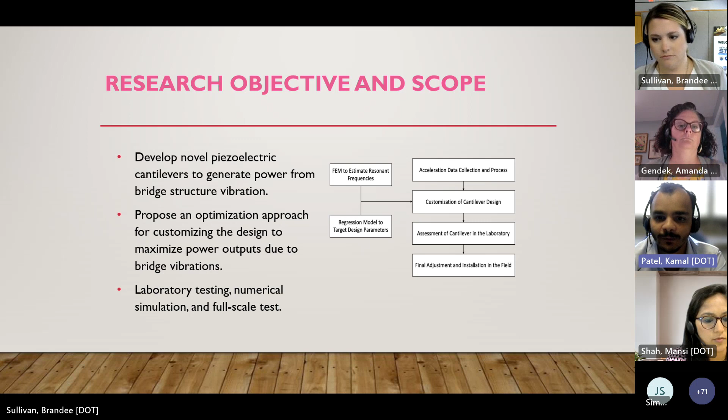During the laboratory testing, the research team determined that there was a correlation with the resonant frequency, so when the material was vibrating, it would create this voltage output, and the goal was to determine at what frequency we would get the maximum voltage output.

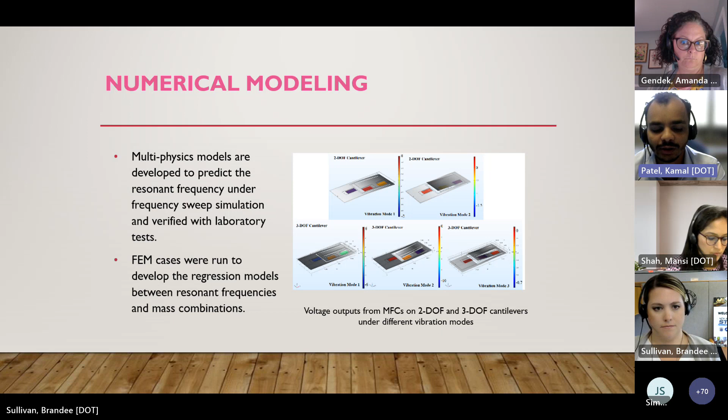Next slide, please. A finite element model was also developed to understand the relationship between those frequencies and the mass combinations. And this model was used on, for example, an entire bridge section, which would have this material attached. And there was also a laboratory test done at, next slide, please.

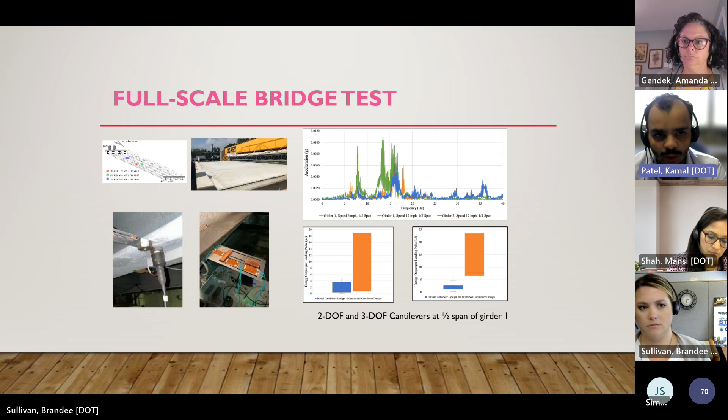A laboratory test was done at BEAST at Rutgers, where a moving traffic load of 6 to 12 miles per hour was applied, which vibrated the material, and it allowed us to get a better understanding of what kind of frequency would give us a better voltage output through different load simulations.

And thank you everyone for your time. These are just a few of the research projects that the Bureau of Research is currently working on at different project life cycles, and there are more research projects to come in the future.

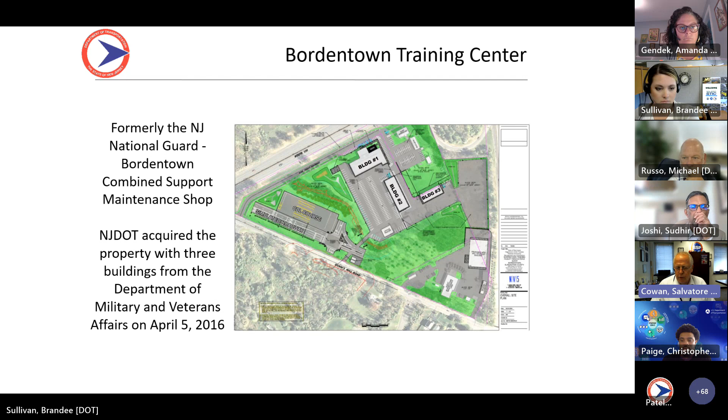Next slide. So it was formerly a National Guard equipment facility. We bought the property from Military and Veterans Affairs back in 2016. That's the layout. It shows the buildings. The first building, about 18,000 square feet. It's got offices, classrooms, conference rooms, everything like that. That's sort of the building when you come onto the property. Next slide. I've got my own little marquee mark there, so you can click them twice. It'll bring it to it.

Building 2. Click it again, about 11,000 square feet. This has got, again, a lot of the training bays. Mike, if you remember, these were the doors that were open along the side of the first building with a lot of the maintenance training bays and the vehicle bays. Next deck. Third building off to the back. Again, manager's office, vehicle maintenance garage bays.

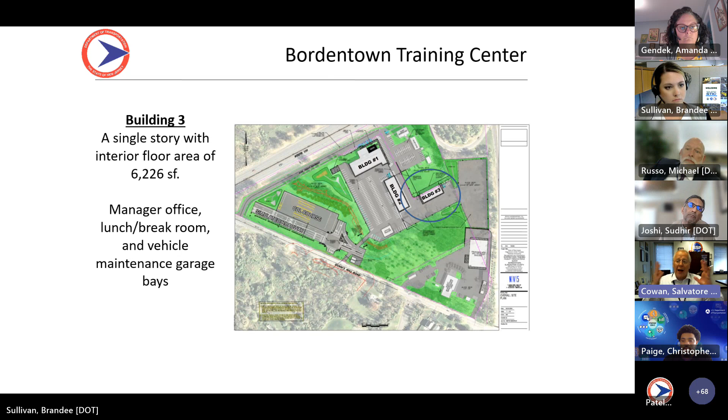So the bigger eye-catching one, if you click it again, brings you to the training field. The training field is unique in New Jersey, fully functioning roadway equipment. Everything from traffic signals to street lighting, crossing equipment, camera systems. We have 2 of our cameras there. We have 2 of our DMS there, drainage structures, as well as a portion of a CDL training and testing area on property. This is where we do our CDL training for the department.

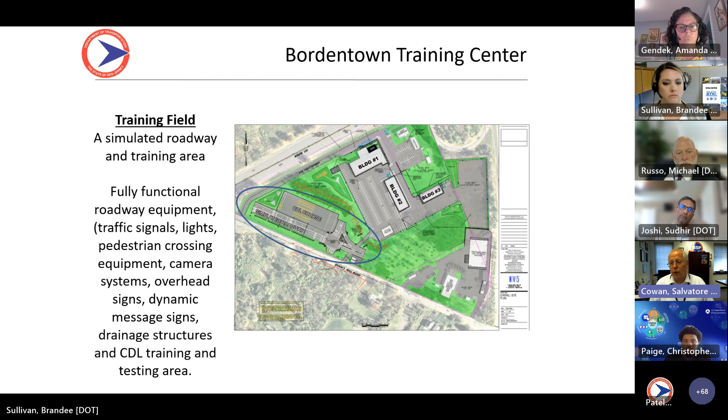Next slide. So Debbie Hatcher-Savis and the team in support services, as well as Jack Longworth in operations administrative support, the training unit. We'll talk a minute about the training unit themselves. Next slide. The building was brought to life at a cost of about $21 million. The entire exterior of the building, the roof, doors, windows, everything like that were repaired or replaced. And the interior, as you saw in those pictures, was completely renovated. They had to do full utility upgrades for gas, electric, and water. They had to do significant stormwater and drainage updates.

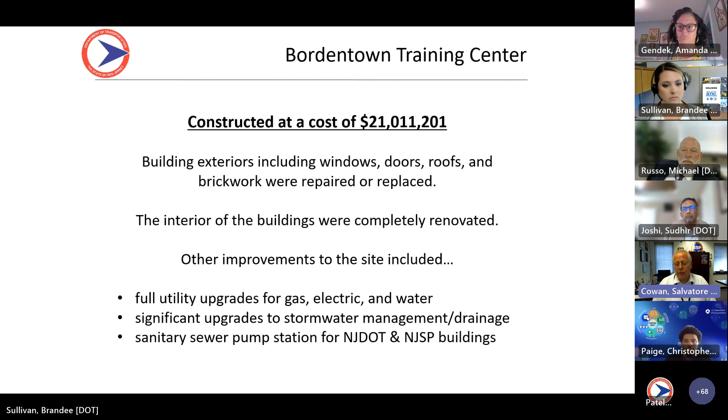The same property is the State Police's Bordentown station. It's right on 295, right where Bordentown and 130 are. So we kind of share the same space footprint. So we had to redo the sanitary and sewer pump station for both buildings.

Next slide. So the Operations Training Unit basically wants to create a culture throughout the person's career to create a more professional, knowledgeable, and proud workforce. The people that can teach it are the ones who do. The people who know it are the ones that are educating the future of the department. So those are the 20 staff that work in the Operations Training Unit.

Next slide. This is a course listing. A lot of it is geared towards operations, you'll notice, but we do have other staff that go through there. You have our volunteers for our winter program. We have CDL courses that are available to other agencies. We have people doing electrical work there, sign shop, new hire engineers, field training, markouts. Our ITS staff is going to be working there from a technical and training perspective.

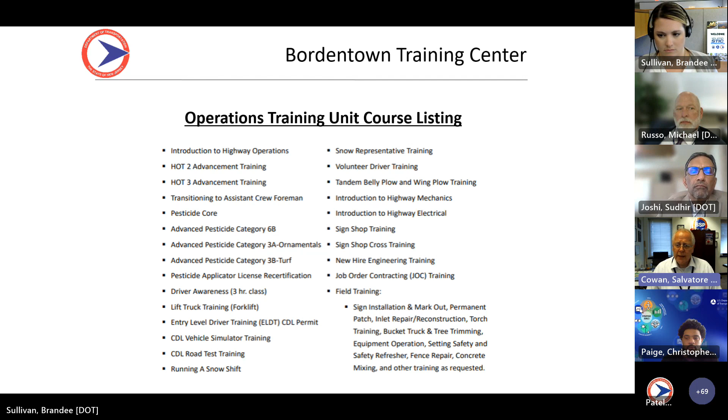And we also have equipment at TCNJ that we're going to be bringing down to Bordentown as part of our test environment. Next slide. And it's not just for TOS&S. This is a very important part. This is a facility that's available to the entire department.

For those of you who are state government employees, you may have remembered last week, we all had to suffer through the Canadian wildfire particulate air. I have 70 personnel who work in Safety Service Patrol. Their job is being out on the highway. We brought them indoors the next day because we said we needed a place for them out of the environment.

Any questions? Please let us know. More than happy to bring anybody over for a tour. We've started holding meetings there. We've started doing training, like I mentioned, with SSP. We'll have our second half of the year traffic incident management stakeholder meeting down there. So this is definitely a facility in use. Melissa Boyer oversees the property under Jack, and Debbie Hatch-Savas from Support Services manages the building, just like every other building in the department. So thank you for the opportunity, Mike.